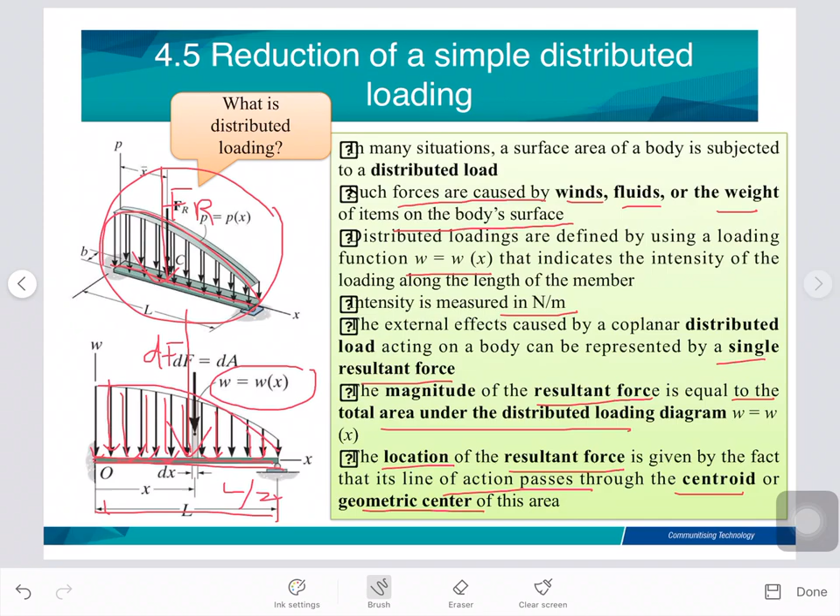This slide shows how to determine the magnitude of the resultant force. Based on this figure, we consider this is the distributed loading. How to determine the force magnitude? This is the force magnitude dF. So dF is equal to dA. dA means the area under the distributed loading. C is the centroid. A is the area under the loading. So this is the FR.

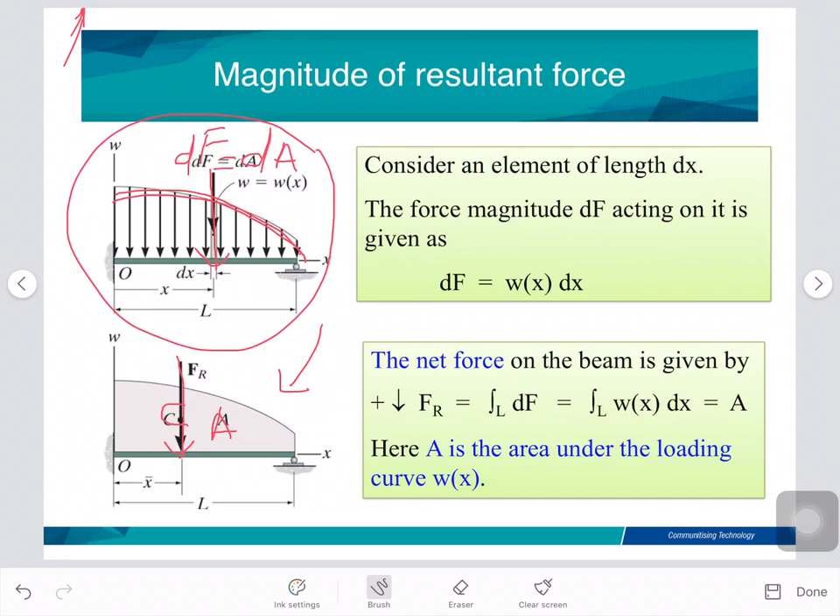This slide shows the location of the resultant force. After we calculate the magnitude FR, we need to get the distance locating the resultant force. Assuming that FR acts at x bar, it will produce the moment about point O. So we want to calculate the moment here. The resultant moment is equal to this distance, x bar, times FR. So we produce the moment.

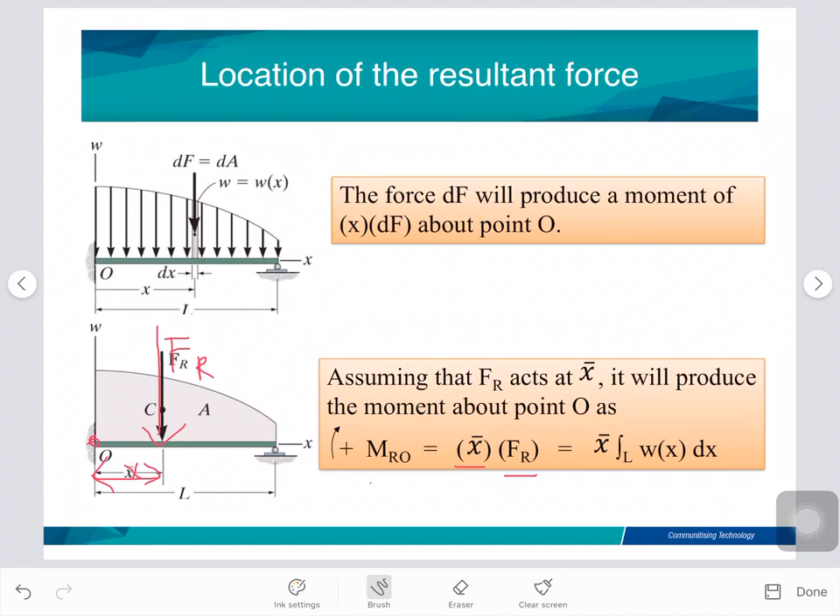This slide also shows us how to determine the location of the resultant force, which is at x bar. It comes from the integration: x w dx divided by w dx, or we can have x dA divided by dA. We only consider this small part. So we can determine the location.

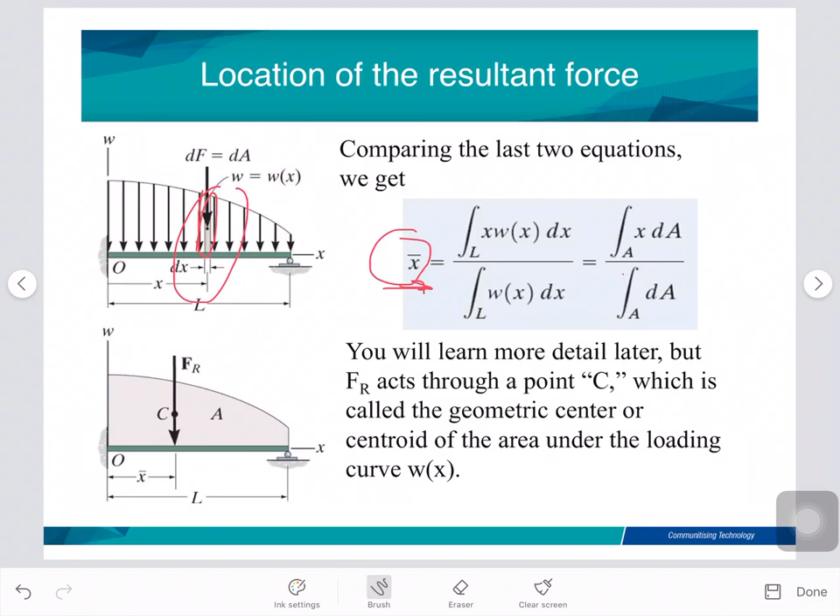Now we go to example 4.23. Determine the concentrated load. What is the concentrated load? Its common name is the resultant force or resultant distributed load. For this example, we have a beam here, and this beam is subjected to the UDL. The intensity of the UDL, w, is given as 400 pound per feet.

First, we need to determine the force resultant. What is the magnitude? The magnitude is FR. FR is determined by the area under the rectangle, since for this case it is rectangular. The length is 10, and the intensity is 400. So the area is 10 times 400, so FR is 400 times 10. The magnitude is 4,000 pound. After we determine the magnitude, we need to determine the location.

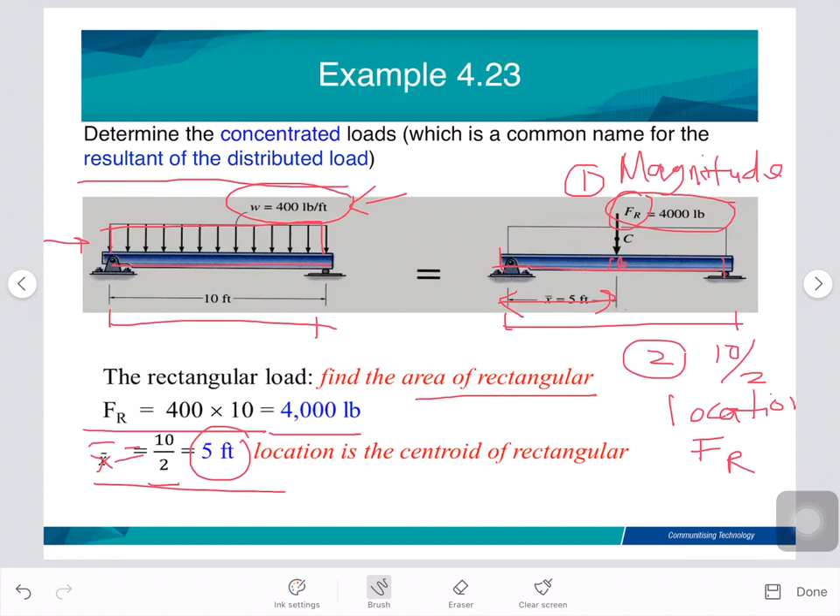How to determine the location of FR? We understand that the force resultant acts at the centroid of the beam. How to determine the centroid? We have 10 divided by 2. So the location x bar is equal to 10 divided by 2, which is 5. That is why the location of the force resultant is 5 feet along this beam. Understand?

Let's move to the next example. Now determine the concentrated load or the force resultant. What type of loading is here? Just now we studied rectangular. This one is triangular. So number one, we need to determine the magnitude of FR. We know that the magnitude is the area under the loading, and the area under the loading is a triangle.

What is the area of a triangle? The area of the triangle is half times length times w. w is 600 newton per meter. This is w. 6 is the length. And half, for the area of the triangle. So the magnitude of FR is 1,800 newton. Next, we need to determine the location. For the triangular load, you can remember, the location is 1/3.

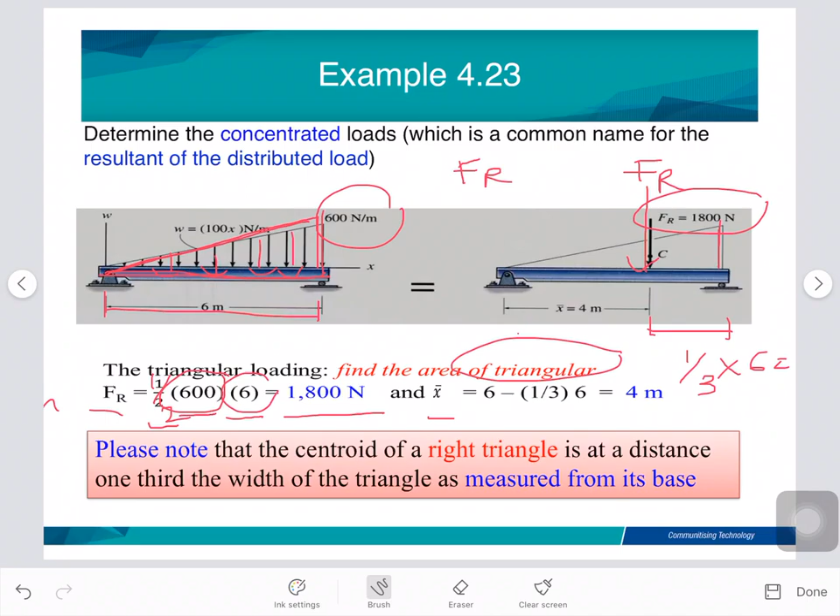1/3 from the base. This is the base of the triangle. So let's say the length is 6. So 1/3 from 6 is 2. So when this is 2, when you measure from this point, 6 minus 2 is 4. This is 4 if you measure from this point.

But you must remember, if we have a triangular load like this, the location of the FR is commonly at 1/3 of the base. Measure 1/3 of the base. Please note that the centroid of the right triangle is at a distance 1/3 the width of the triangle as measured from its base.

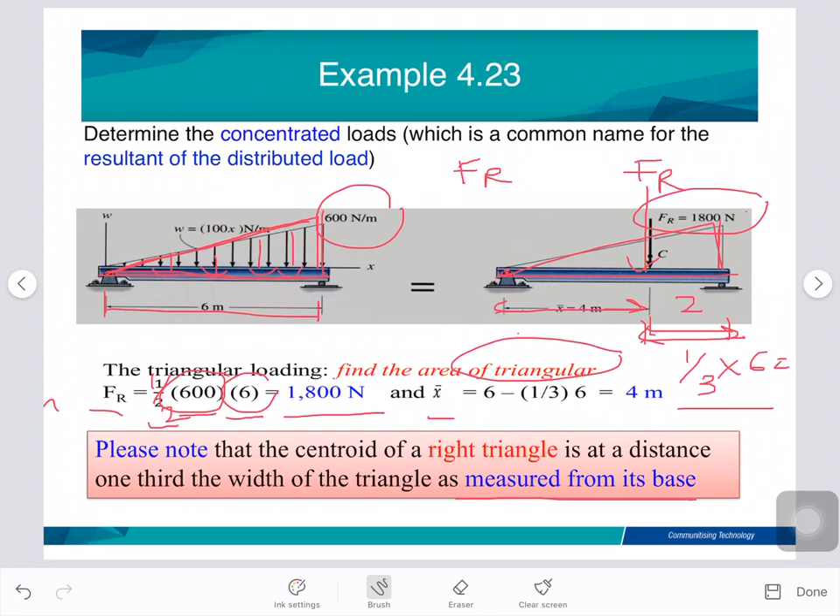Okay, next, example 4.24. The loading on the beam is as shown. Determine the equivalent force and its location from point A. So you can see here how many types of loading. This is the beam AB. So you have two types, right? One part is a triangle and one part is a rectangle. So we need to determine the force resultant and the location from A.

So number one, the distributed loading can be divided into two parts, one rectangular loading and one triangular. And then how to determine the force resultant? We understood that the force resultant FR1 must be acting here, right? Here is 1/3 from the base. And then FR2 is located at the center of this line. This line is 8, so 8/2 is 4. So this is the location.

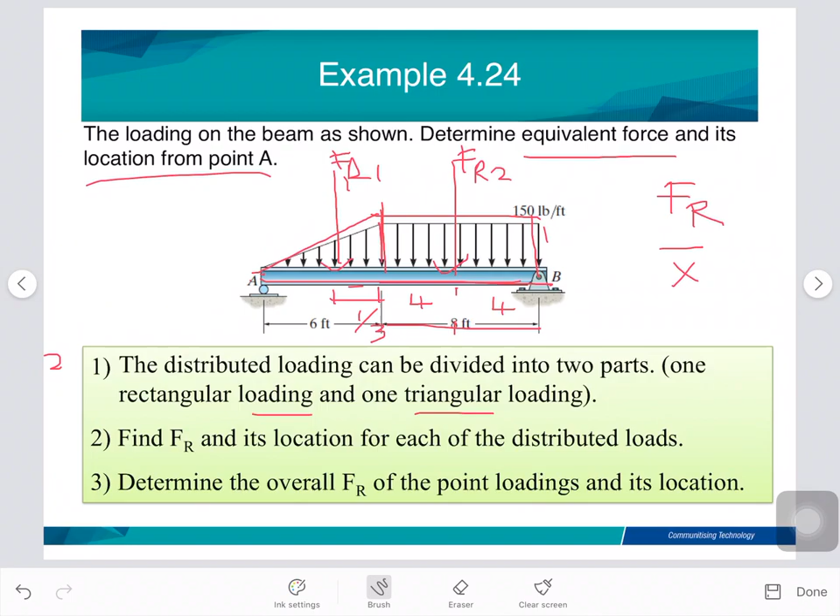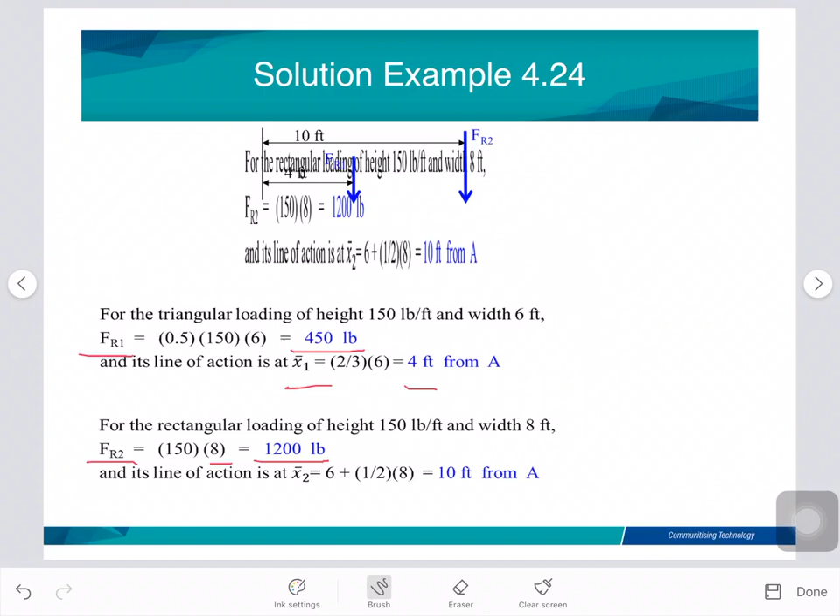So how to determine the FR? FR is the area under the loading. So you need to determine the triangular area and the rectangular area. Can you do that? Yes, definitely. So for FR1, half times 150 times 6, you get 450. This is the location we already determined from A. And then for the rectangular load, FR2, 150 times 8 is 1200. This is the magnitude for FR2, and the line of action is 10 feet from A.

So this is FR1, this is FR2. The total force resultant is FR1 plus FR2, equal to 1650 pounds. And then we want to determine the moment resultant about point A. So we need to resolve both to point A: 450 times 4 plus 10 times 1200. So the total moment resultant is 13,800.

So now this is the total force resultant acting like this. We need to determine this distance, the location. Since we know that MRA is the force resultant times this X, to determine X we divide 13,800 by 1650. So we can determine that X bar is equal to 8.36 from point A.

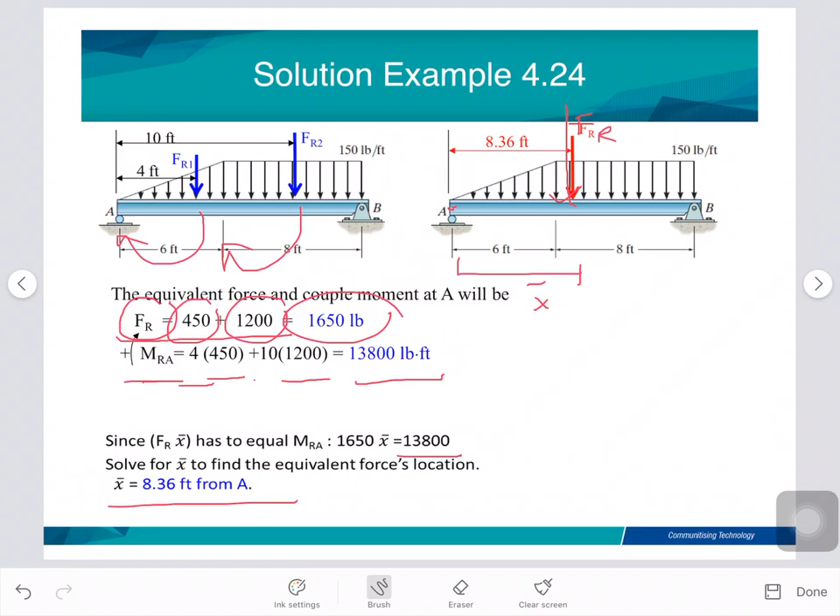Now we move to the last example, 4.25. The loading on the beam is as shown. Determine the equivalent force and couple moment acting at point O. So what should you do? What type of loading? You have two triangular loads, this is one part and this is another part. We know that the location of each FR must be 1/3 from the base. So this is FR1, this is FR2. Don't forget, this is the point load and this is the couple moment, 500 kN·m.

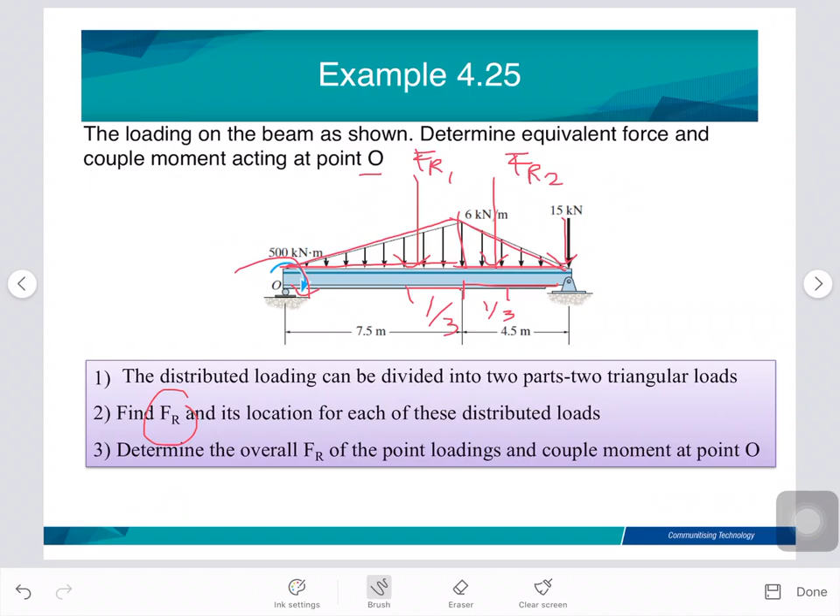So to determine the force resultant, we need the magnitudes FR1 and FR2, and then the locations. FR1 is half times 6 times 7.5, so the magnitude is 22.5. The location is 5 meters, because 2/3 times 7.5, from O. Then FR2 is half times 6 times 4.5, equal to 13.5, and its location is 9 meters from O. So this is the location for FR1, and this is the location of FR2.

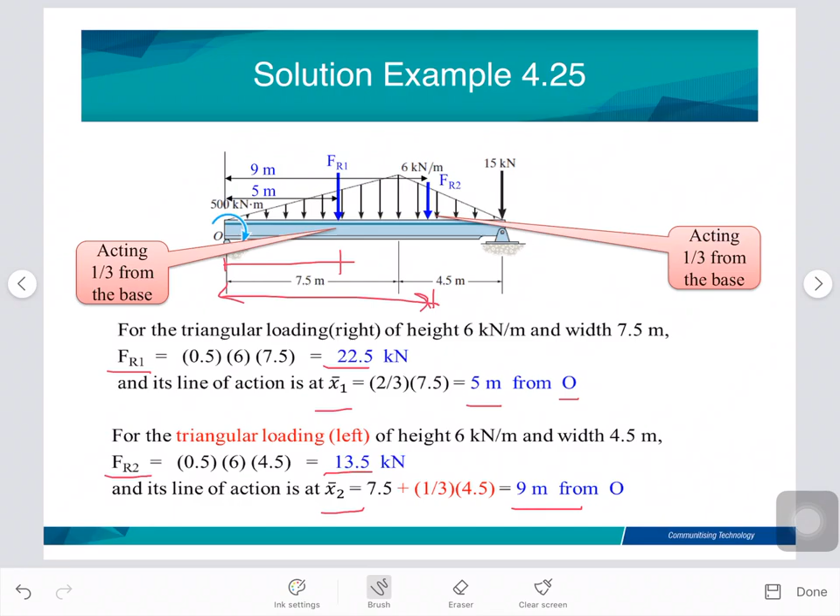Now we need to combine the three forces. The total force resultant is FR1 plus FR2 plus this point load 15. Now we resolve the moment at point O. The moment resultant at point O: we just take 500 because it's a free vector, plus FR1 times 5, plus FR2 times 9, and the last one 15 times 12. So the total moment resultant is 914 kilonewton meter.

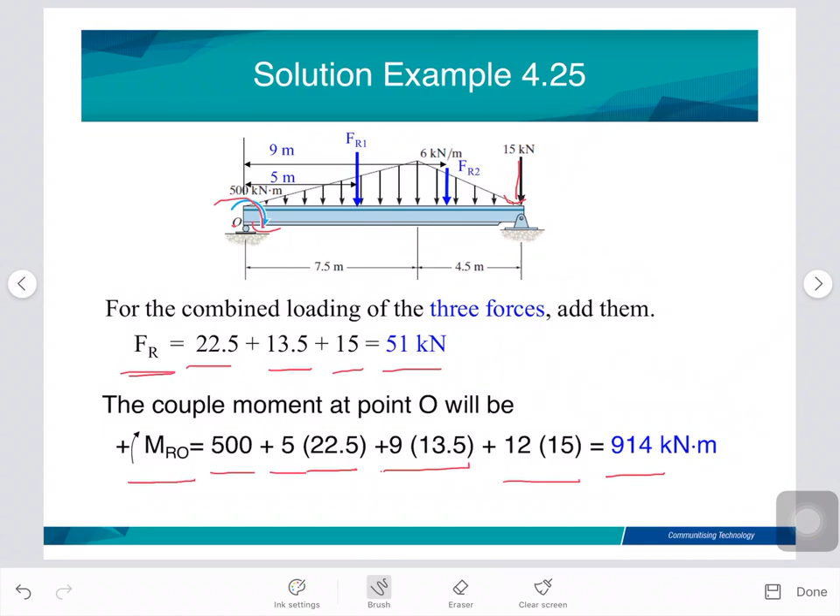Okay, that's all for today. Hope you can achieve the outcomes of the lecture: number 1, you should be able to determine the force resultant; number 2, the magnitude of the force resultant; and number 3, the location of the force resultant.